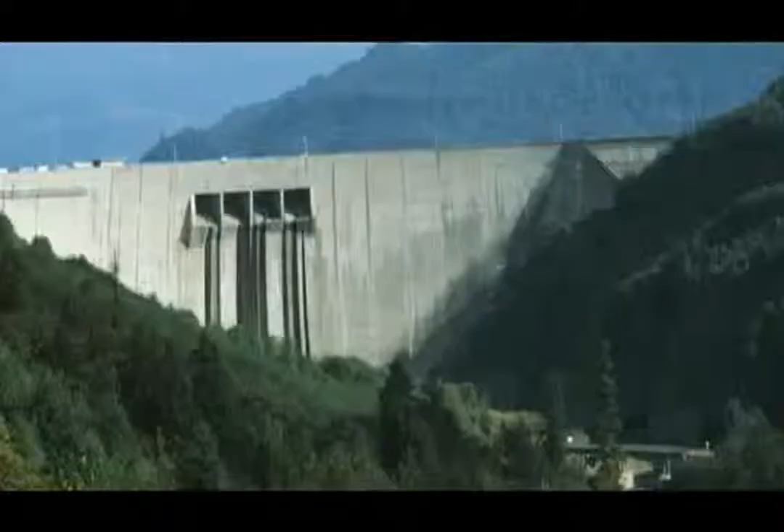There is something wrong with the Earth. We have too much to lose as civilization progresses without regard to geo-environmental change. Will you help us protect the world that we live in? This is the proposition of TRIM Corporation Limited.

On the Earth that we live on, there are many problems on our hands: global warming, air pollution, destruction of the ozone layer, contamination of seawater, and the heat island phenomenon. The garbage issue is an especially alarming matter. The illegal dumping of garbage prevails all over the country, and the environmental pollution it produces troubles Japan.

As part of this trend, some approaches for environmental improvements have been developed. The importance of recycling is growing.

However, among these, recycling glass bottles in particular has been falling behind. The amount being recycled is 350,000 tons. The recycling rate of glass bottles has halted before 40%. Why has recycling glass bottles been delayed in this area?

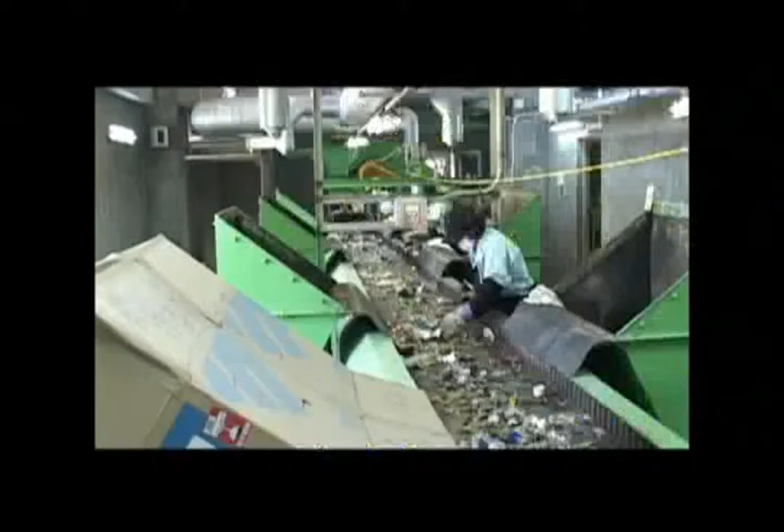There are two ways to recycle glass bottles. One is the returnable system, which reuses the used glass bottles repeatedly. The other is the one-way system, which uses the raw materials of new glass after smashing them to pieces. Both ways cost time, effort, and money.

Even today, at repository sites, glass bottles are still separated by hand. Among those are broken bottles to be handled with risks. A major stumbling block in the garbage issue is the recycling of glass bottles.

Are we actually able to recycle these glass bottles? This was the matter that became the starting point for the recycling business of TRIM Corporation Limited.

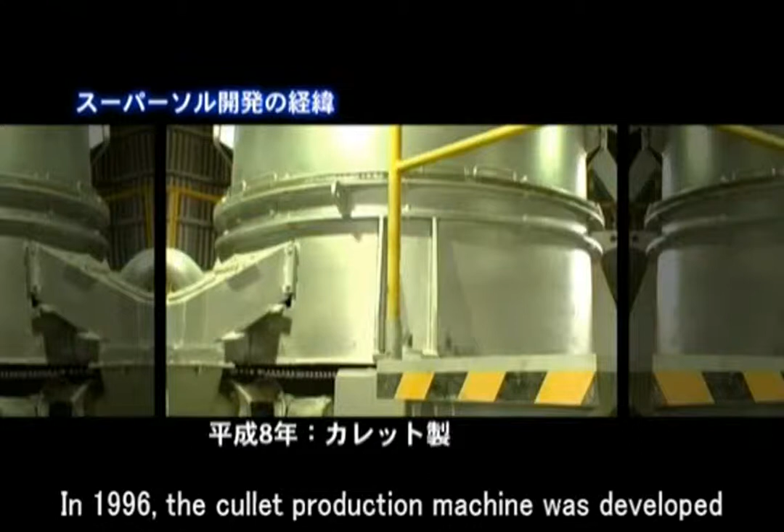In 1995, a project team to recycle glass bottles was formed. In 1996, the cullet production machine was developed. We won the top prize at the Industrials Festival in Okinawa. We invested and studied even more to enhance the system.

In 1998, a model plant at Yaese Town in Okinawa was built. In the next year of 1999, the creation of the lightweight material Supersol was started. Then the recycling business of TRIM Corporation Limited was fully put into action. In a variety of areas, a huge demand of Supersol was born.

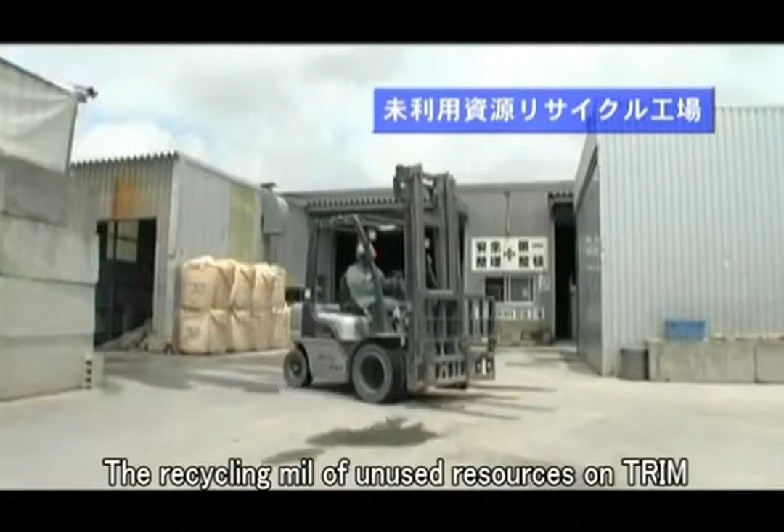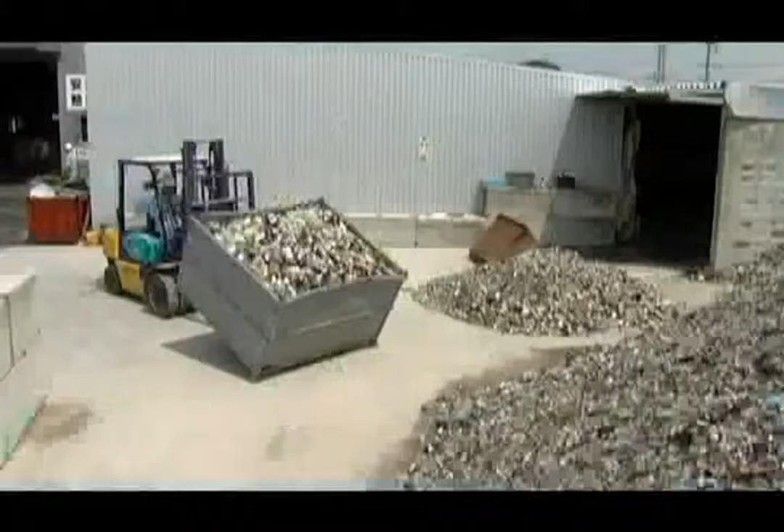The recycling mill of unused resources at TRIM Corporation Limited can produce this material Supersol, which is completely different from the shape and features of glass, although made from glass bottles. The recycled glass bottles used at this mill are the same waste-collected bottles from the community.

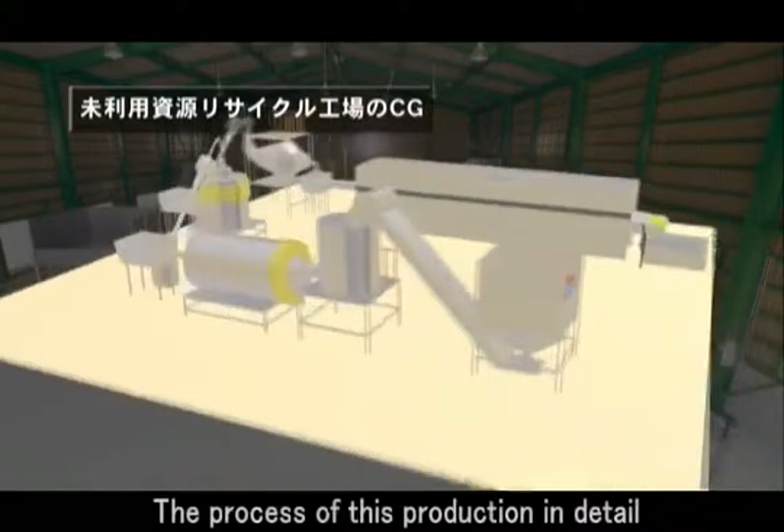Regardless of color, size, and shape, you only have to throw the glass bottles into the machine, then the Supersol is automatically produced. Now, let's look at the process of this production in detail.

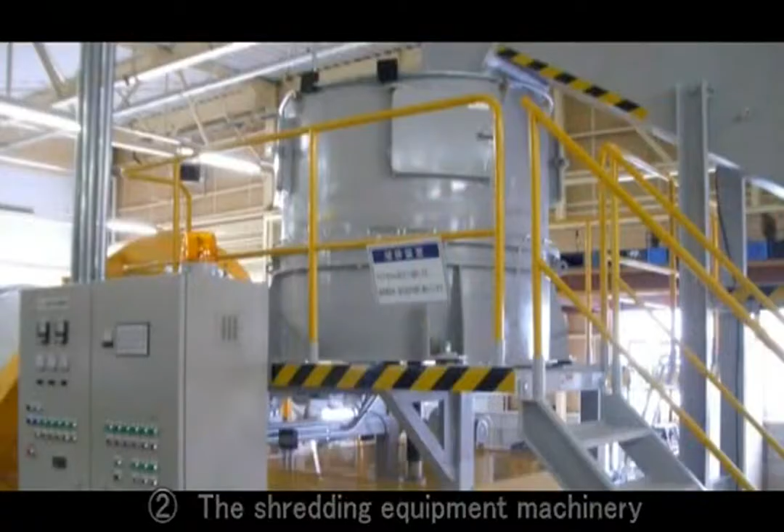First of all, the glass bottles are thrown into stock in the raw material hopper, then move automatically on the line. Then they are smashed to very small pieces by the shredding equipment machinery. Though it is compact glass, even said to be harder than iron, they are pressed into small pieces.

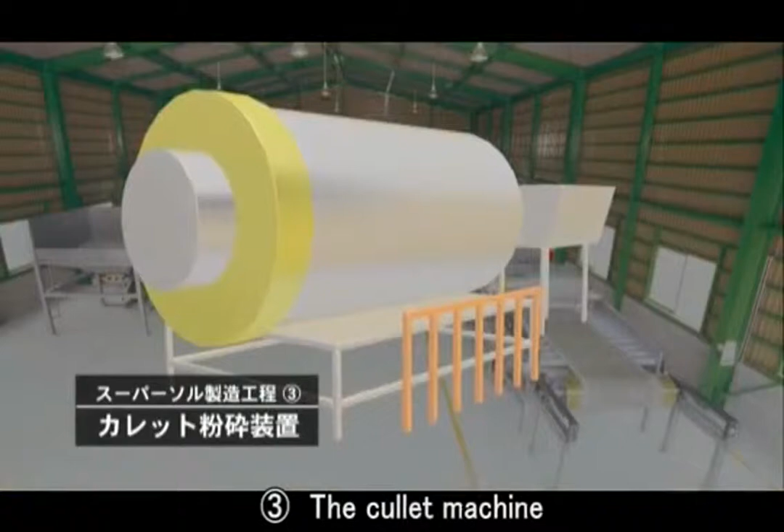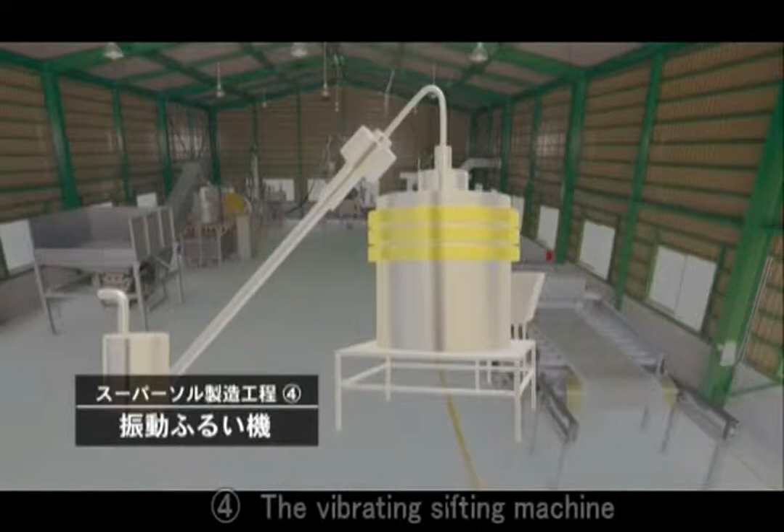The small pieces are routed to the cullet machine. On this pressing machine, the glass is crushed into a very soft flour-like powder. It is hard to even think it was glass. The powdered glass is then moved to the vibrating sifting machine to specifically select only the finest powder.

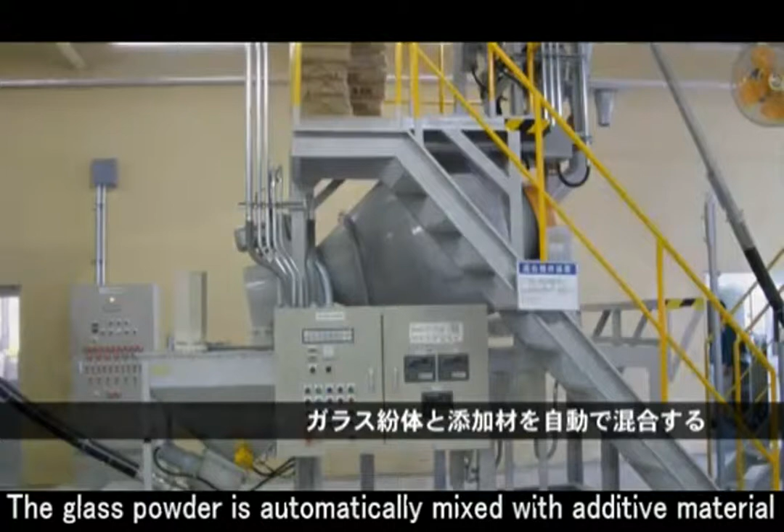Next, the glass powder is placed into the mixing equipment. The glass powder is automatically mixed with only 1% additive material. Evenly mixing and sifting the glass powder and add-in material, this process can finally produce Supersol with consistency and quality.

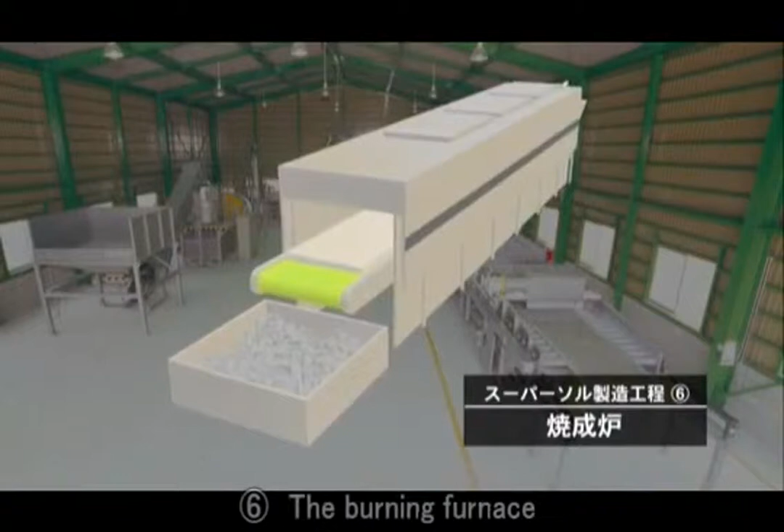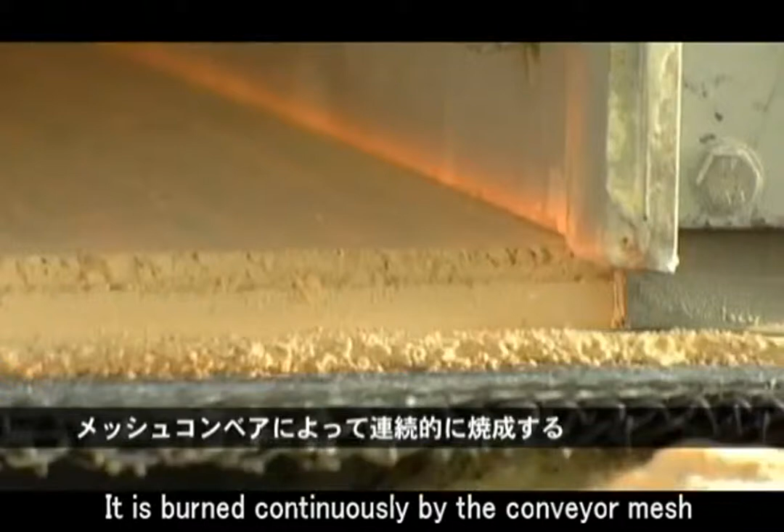Finally, the glass powder is transferred to the burning furnace to be reborn into Supersol. It is burned continuously by the conveyor mesh. The temperature of the firing furnace can be adjusted so that the process is completed with high-quality detail and care.

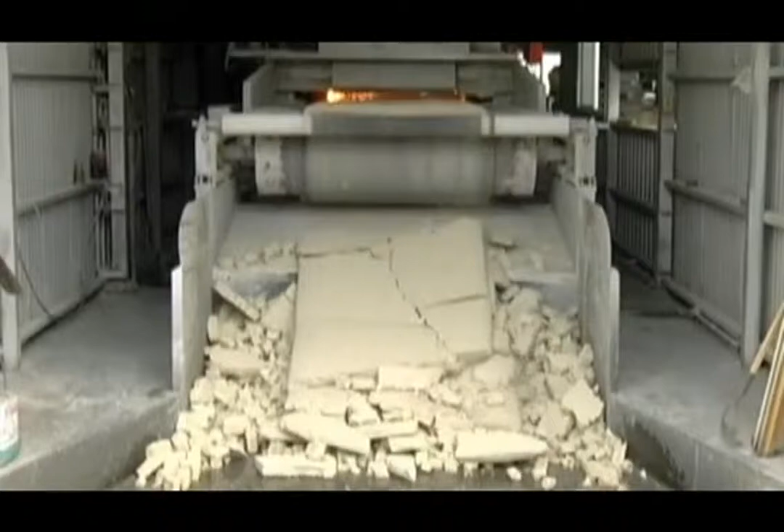By following this process, the foamed and inflated powder is drastically cooled down by coming in contact with the air and is broken up into smaller sizes. The Supersol can be created to suit various needs because there is a lot of flexibility in the creation process, such as specific gravity, the intake rate, and so on. This is how Supersol is created.

Glass bottles have been reborn into a different shape and behavior, a completely new product. With its highly valued add-on features, Supersol is in high demand for various areas.

Now we will introduce the special features of Supersol.

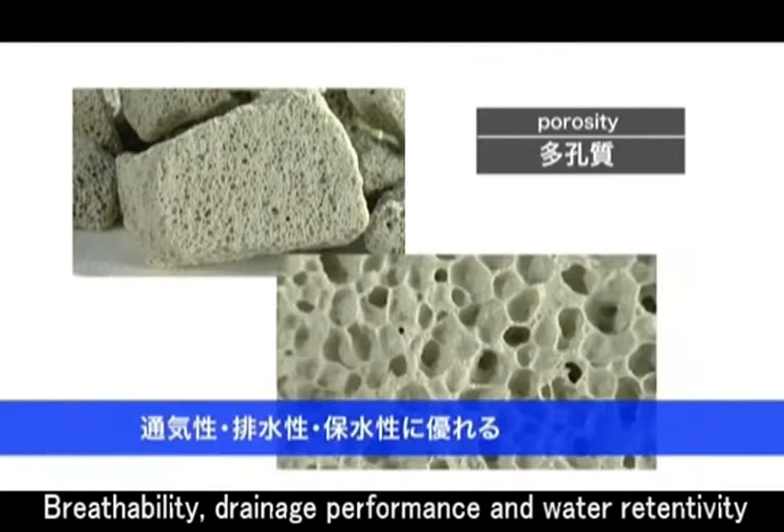One of the big features of Supersol is porosity. It is very useful for various areas, such as tree planting or civil engineering work, because of its breathability, drainage performance, and water retentivity. It is also said to be an inorganic mineral, usable in harsh conditions because of its high resistance to temperature, water, and chemicals.

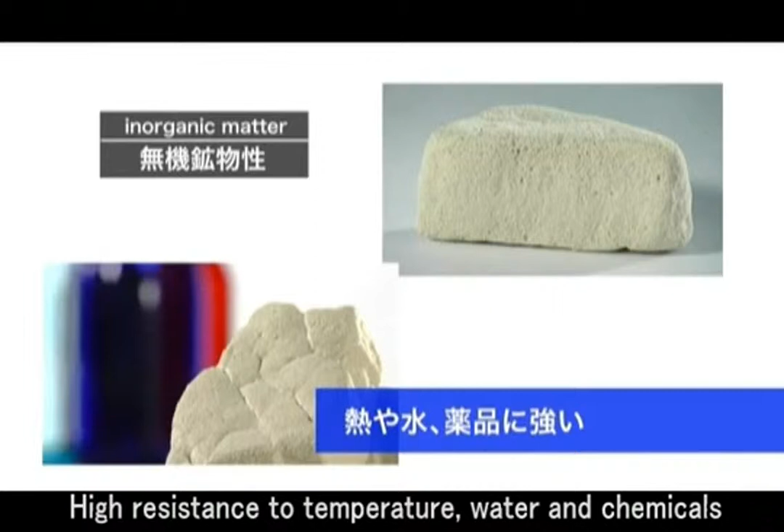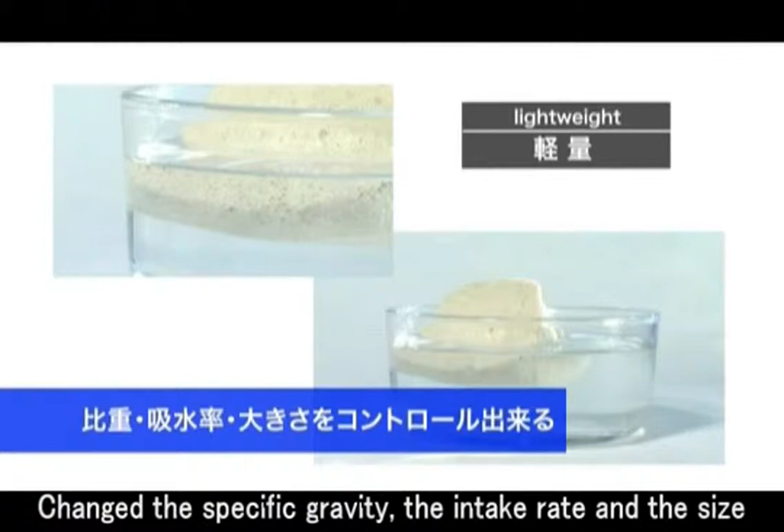The most peculiar point is its weight. It's very light, light enough to float on water, so it can be changed to match a specific gravity by changing the intake rate and the size, giving complete control to match the product to its use.

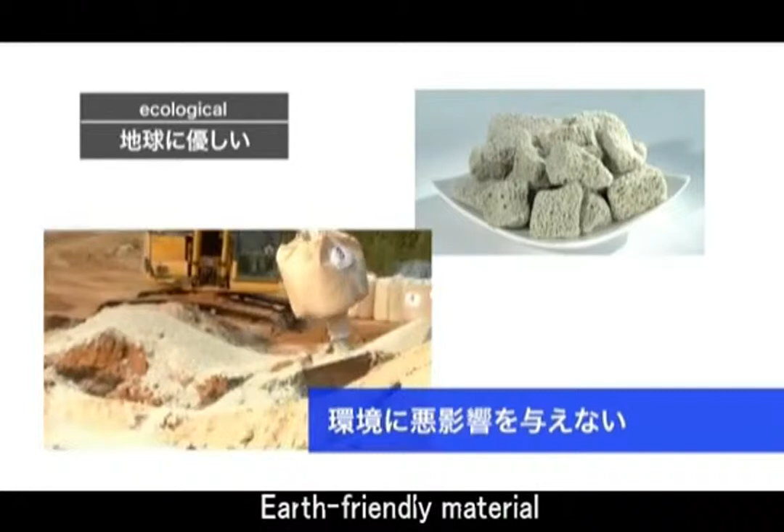Above all, it is an earth-friendly material. Supersol is often used together with soil or as a filter material, so it can be completely recycled from soil to soil.

There is a growing need for Supersol around Japan because of these features.

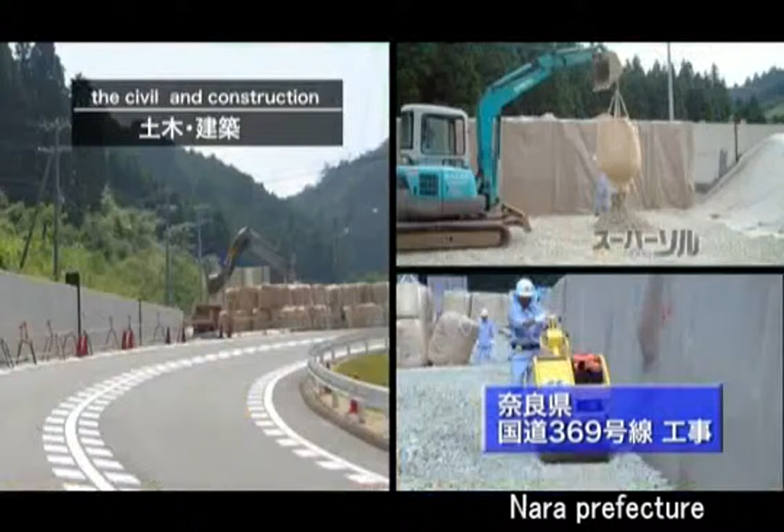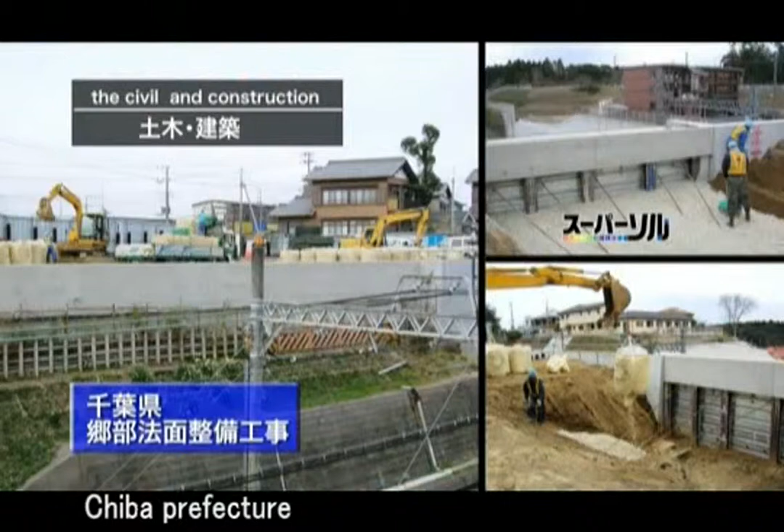In civil engineering work, it is used in a variety of ways in material construction, the backfilling of retaining road walls, and in gravel trenches, taking advantage of its lightweight and drainage performance features. The performance statistics and construction results are expanding nationwide, already foreseeing an increase in demand for more product.

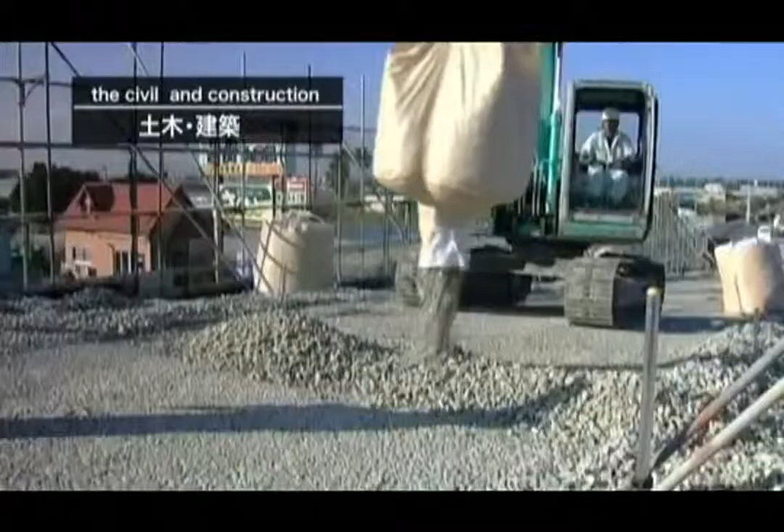Let's look at an example of it being used in construction areas. It is easy to use in construction because of its lightweight features. It can simply be mixed with soil to become a non-pressure weight against man-made walls. Adequate strength can be adjusted by paving Supersol through basic surface compaction and soil tamping.

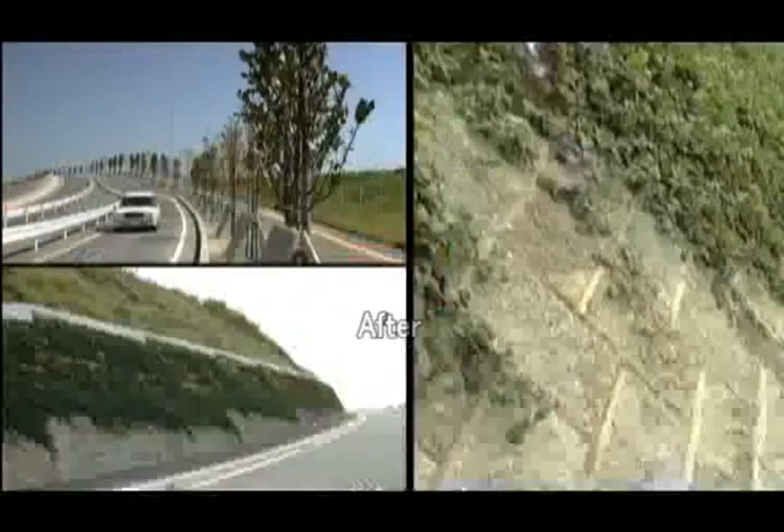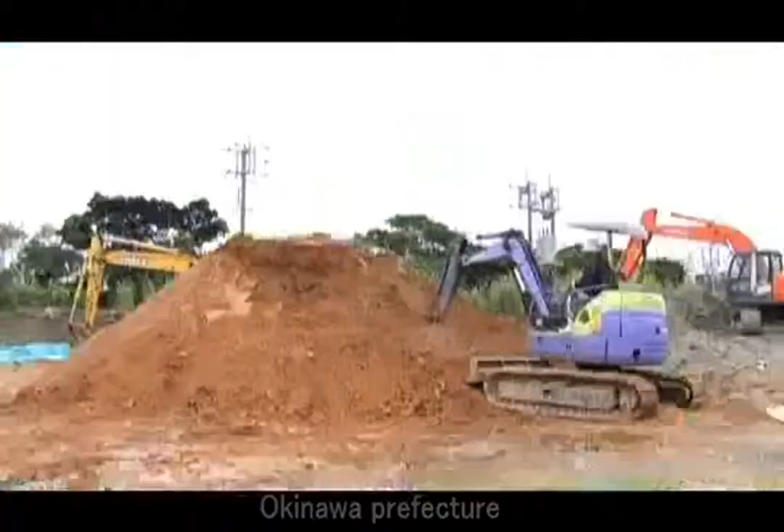It also draws attention by being used as a material in tree planting. Porosity as a feature of Supersol keeps the balance of fluid and air in the soil for plants. Therefore, it is used as the material for planting trees in many fields. In such cases of using Supersol in planting work, it is mainly used as a soil conditioner.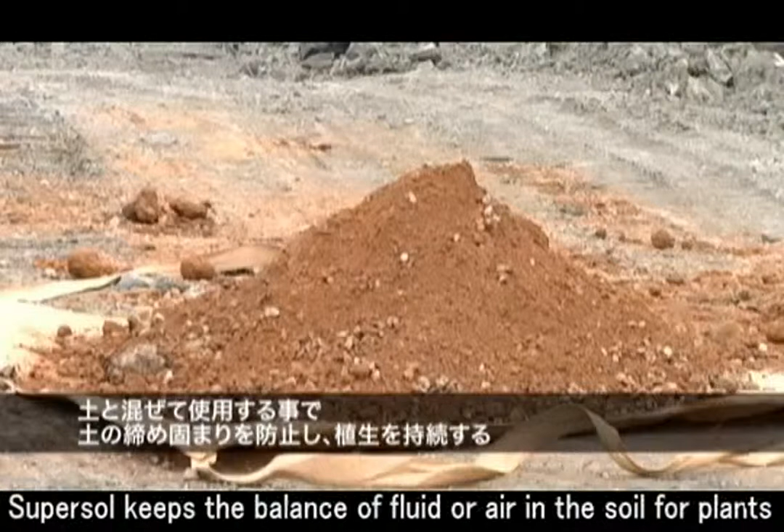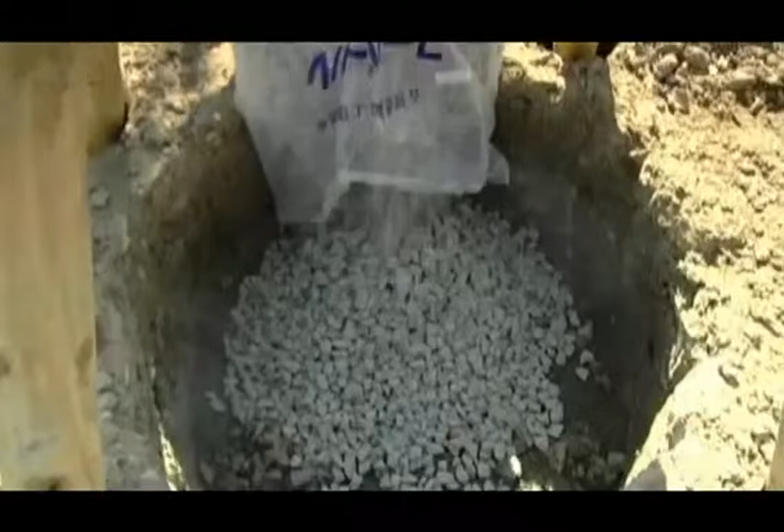In this park, the planting work with Supersol and oxygen tubes took place. After lining a hole for planting with Supersol, oxygen tubes can be placed in. This oxygen tube that includes the Supersol can make the aeration property for plants better.

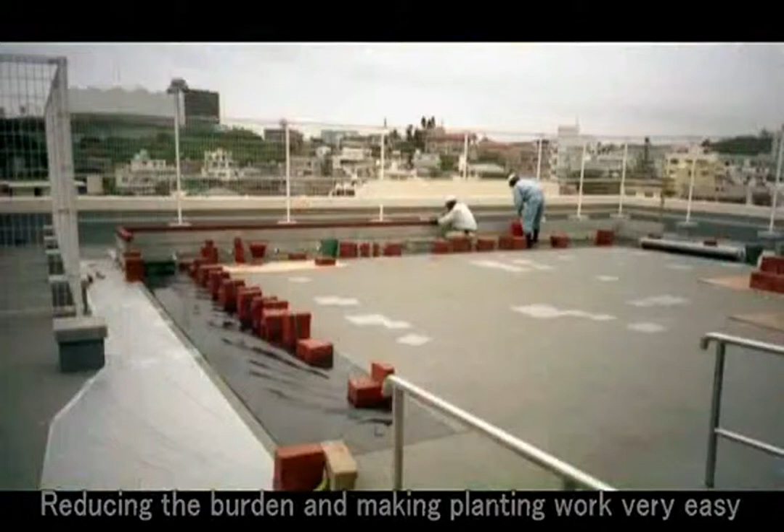Supersol is very useful even in planting trees on rooftops. The Supersol construction method reduces the burden and makes planting work very easy. That is why significant cost cutting can take place.

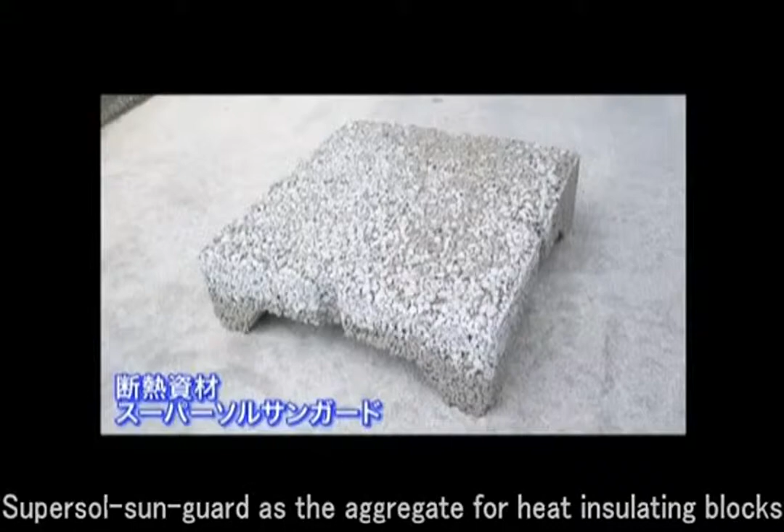It is also used as the aggregate for heat insulating blocks. The Supersol SunGuard is an excellent material for heat insulation. By simply placing it on the roof, the room temperature is lowered.

Supersol is also used for large-size green planting indoors. In the grass establishment of this resort hotel, it is put in place as a new system without soil. A mix of brick stone and Supersol is used instead of soil. It is easier to manage plants and the building using this than using soil, as well as keeping the room cleaner by lowering the risk of fungus and contamination.

There are many other various forms of use: plantations in hospitals or schools, use in material for farming soil amendments or water quality clarification, sale as garden material in do-it-yourself stores, and much more.

This resort hotel uses EM Glassstone, which introduced the EM technique to Supersol. A variety of plants like vegetables are being cropped in the garden on the roof.

In this way, we can see many examples of the highly valued material Supersol. It is expected to also be used in water clarification of sea and rivers or bank protection projects in the near future. Trim Corporation Limited will constantly brainstorm and work aggressively to raise the demand for their product.